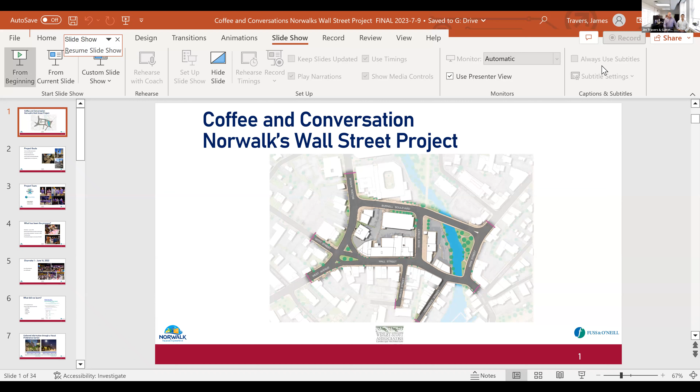Can I interrupt you for one second, guys? Can you put your presentation on slideshow mode? It didn't come up that way. It is on slideshow mode for us. Hold on, we'll stop sharing and restart it, because we're showing it on slideshow mode. Okay, hold on one second—a couple of people said they couldn't see it, so I want to make sure everyone's seeing it as you talk. Are we seeing it in full screen now? Yes. All right, that's great, it's just the same way we left it. Perfect, oh good—and one of the people who couldn't see it can see it now, so maybe there was just a little glitch.

Zoom quit unexpectedly. Am I still there? You're good, we're on the project team slide. That's weird, I just got a mess. Okay.

All right, hold on one second. Now I froze, right? All right, there we go. Okay.

So building upon that, the first workshop was June of 2022. From there, we gathered all the information of what people said in a really exciting way. We shared those ideas in our second design charrette in November of that same year. From that, we wanted to make sure we were on target, that what we heard from you, your priorities as a community, aligned with the data we're finding from traffic and land use. And we got a final design.

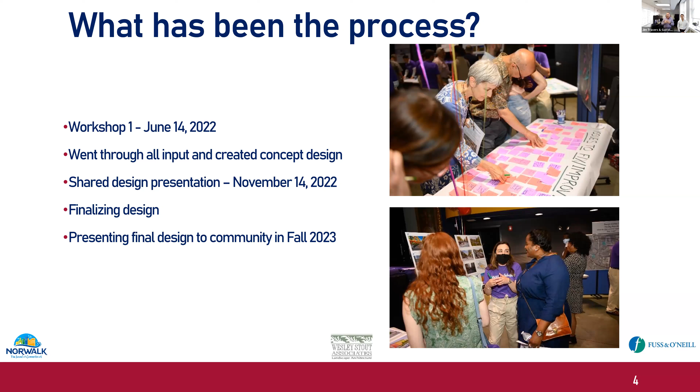We got the okay, and we're fine tuning that. We're going to present the final design to the community this fall, and then start ramping up the actual construction documents from that. We'll have a good baseline of really where we're going to go with the whole plan at that point.

So I want to talk a little bit about some of the outreach we did, particularly the first meeting. As Jim mentioned before, there were a lot of planning studies done, about one every 20 years, so there was some disbelief that this project was actually going to get done. We really wanted to make a big splash with our first public community meeting, and it was really all about just listening, without any preconceived notions or designs in mind.

So we chose a site within the neighborhood. I think it's really important to bring the project to the neighborhood, and that was the historic Wall Street Theater. As you can see, it's really large - we were able to accommodate over 350 people, but really it's about having good outreach.

It's just about making it fun. We were all wearing purple shirts, some with fun sayings like 'amaze walls,' 'wall-tastic,' 'wall sensational,' just to bring some levity to the project. We also brought in local vendors and businesses to do a tasting of Wall Street, so we had a lot of food available to really highlight the strengths of all the businesses in the area. We worked with the library to bring in historic photos, and had a section you could walk through to relive some of the history of the neighborhood.

In an effort to really make a splash, we had an elementary school band there to lead the kickoff. But we didn't do a formal presentation - it was designed as a charrette with a lot of different tables for engagement, which allowed us to get a lot of feedback, whether through sticky notes, writing on posters, or just having a conversation with the project team. We were able to get over 3,000 individual inputs, which was really fantastic.

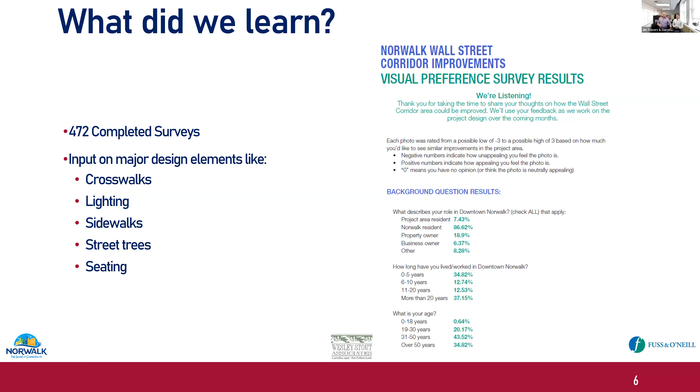From the survey, this is a quick glimpse of what it looked like. We provided an online survey allowing people to look at images, and then we asked them to rate those images. How did it make you feel? This is about creating an environment, and an environment is about how we feel. So we asked: did people find this kind of lighting appealing? That became the driver of how we went through with the plans going forward.

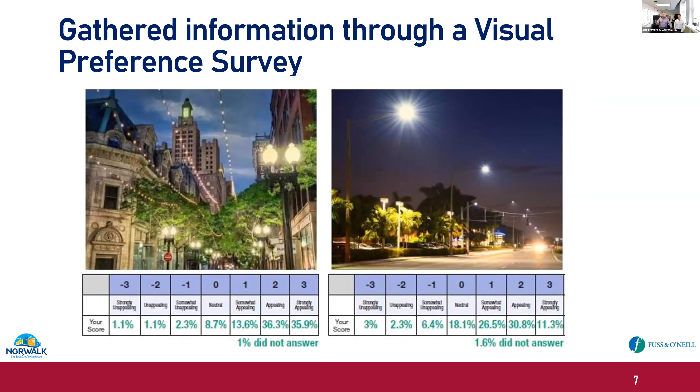So next, just summarizing what we heard. A lot of it was about the neighborhood and its scale. We understood from the public that it was really designed to be auto-centric for throughput of traffic, and one of the largest pieces of feedback was about bringing down the scale to a pedestrian level. And of course there were a lot of safety concerns.

This corridor itself has some of the top ranked intersections for crash rates in the city, and also some of the top roadway segments. So we heard a tremendous amount about safety, and not only safety, but also perceived safety as well.

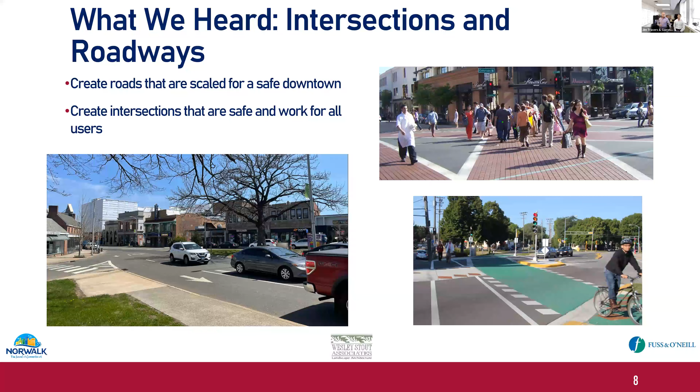Parking, right? We always hear about parking. So the parking was a number of things. The city instituted angle-in parking a few years ago, and what we heard in large numbers was that people didn't like angle-in parking. They wanted to make sure the new plan didn't include it. But we also have a garage, which many areas don't have the luxury of.

But our garage was built in the mid-1970s, and it very much looked like the 1970s. So they also wanted improvements to that garage, and you'll see on the lower left of your screen what the new garage looks like. We're adding a cornice to the top, a cornice to the bottom, and painting the ribs in between in varying shades of blue. The community got to vote on what the final look was.

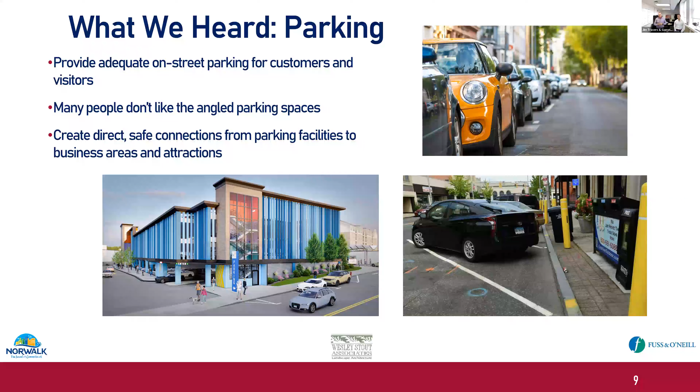We had a number of different colors and options to choose from, and we're also creating a plaza. What you're seeing on the left-hand side is largely the back of house, but we're changing that to really be an integral part of the safety, mobility, and invitingness that comes from our facilities. One of the things that's really interesting about this project is it's at the city center.

It's also at the convergence of several of our trail assets. We have the Norwalk River Valley Trail, which is going to be a regional attraction. We have the Harbor Loop Trail, and we were also looking at doing some types of river walks. So it was really important that we continued to provide that multimodal connectivity through the neighborhood.

One of the advantages to redesigning a downtown area is if we can't accommodate a dedicated bike facility on one street, we can look at other streets. What really came out of the meetings was Wall Street—there was a really big desire for wider sidewalks, and we could only do that if we moved the bike routes to a different roadway through the area.

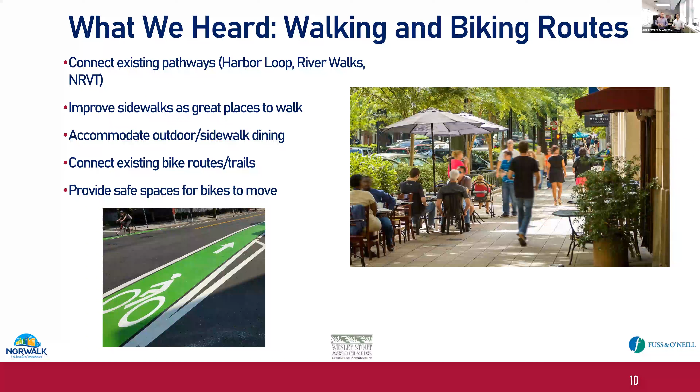So we looked at Burnell Boulevard as being that bike route, and it worked really nicely because we had a pulse point and a transit station it would connect directly to. There were a lot of trade-offs we made, but ultimately we were able to capture all these elements in the larger project design. So back to the transit facilities that we heard about.

A number of years ago, the city turned Burnell Boulevard from two-way to one-way and made it a transit hub. We have limited crossings across the Norwalk River, and this presented a bit of a challenge.

The neighborhood really wanted the bus pulse point to be integrated into the neighborhood, moving from the angle-in buses to parallel stops that we can elongate through the entirety of Burnell Boulevard. We heard that, and we want to improve the transit facilities, so our plan includes that.

Gathering and event spaces: we met with the community on several occasions, and this was a really critical part of the project. They had looked to close some existing streets, such as River Street, but it was cost prohibitive. So a big part of this project was designing a curbless street from the ground up to accommodate these gathering spaces.

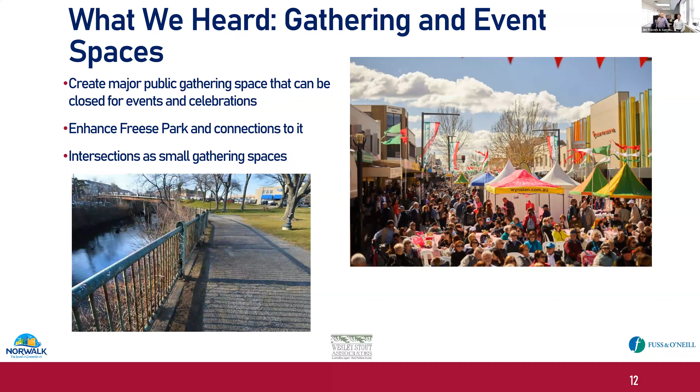Traffic, the thing we live and breathe, right? Garrett was talking before about the challenges - this is the first crossing of the Norwalk River that's north of 95. So it's really the first local crossing that we have.

We knew that presented a challenge, so we went through data gathering, did analysis, provided the results, and that led us to what we could do. We have to make traffic work. We heard from the community that safe throughput of vehicles is our priority as well - it's been our priority for our careers. But what we were really able to find is that it's possible to accommodate high volume traffic areas and really create a complete street.

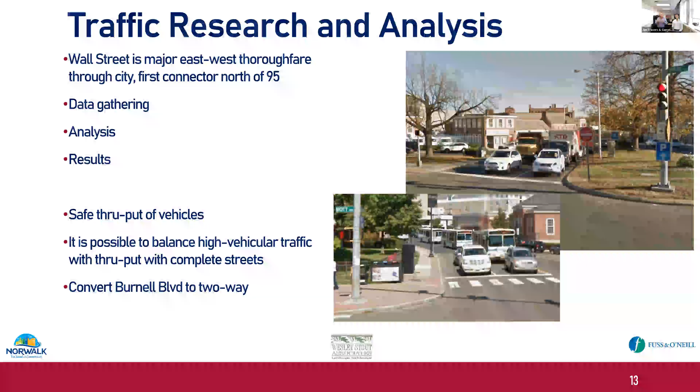We redefined what the bus pulse point could look like, and we are positioned to convert Burnell Boulevard to two-way.

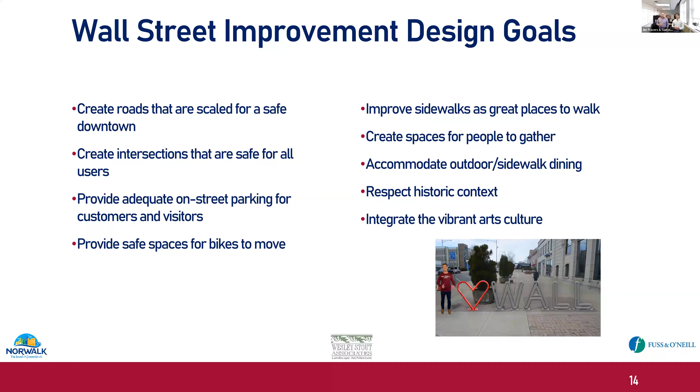Just to review the design goals: bringing the scale down to a pedestrian level was a priority, along with making sure we could accommodate all modes throughout the entire project area. Parking is a priority too, to have it adjacent to businesses and improve access to other facilities. We have a lot of parking in the area, whether lots or garages, but the biggest criticism today is just the perception of safety, so that's something we really looked at. You'll also see emphasis on getting gathering spaces strewn throughout the larger corridor project and bringing in some of the history.

So we're going to run through what the design looks like. We'll go through it quickly since we're a little late on time. Are we good, Melissa? Okay, great. Perfect, then we'll just go ahead.

If everyone can free up the rest of the afternoon, we can talk about Wall Street until we are blue in the face - Belden, West, and Wall intersection. This intersection was the first thing that Garrett and I looked at, and we thought, whoa, there's a lot going on here. We have high speeds because of these pull-ups, and as we looked at it, we found a lot of crashes coming through this corridor.

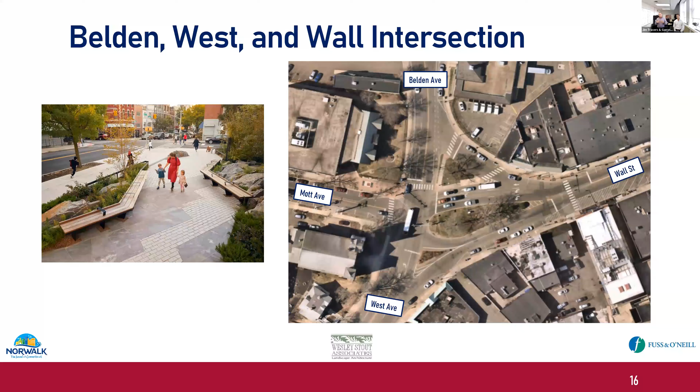The thing many of you probably noticed is that if you're a pedestrian, you're screwed - you just can't get through here. You can see in the center island there's a line where pedestrians have just started walking through; we're not accommodating pedestrians here. That's one of the first things we really wanted to fix: create a pedestrian-friendly environment. So we have a realignment to this - drum roll - you'll see two big plazas appear on each side, and a normalized teed-up intersection that tees up with Mott.

And we've created the correct number of lanes that's going to support the traffic, so we're not going to have backup, but it's really going to create a gateway. These plazas on each side are about creating a gateway into the community. We're seeing something like inspiration coming to us from the image that was on the left of the screen.

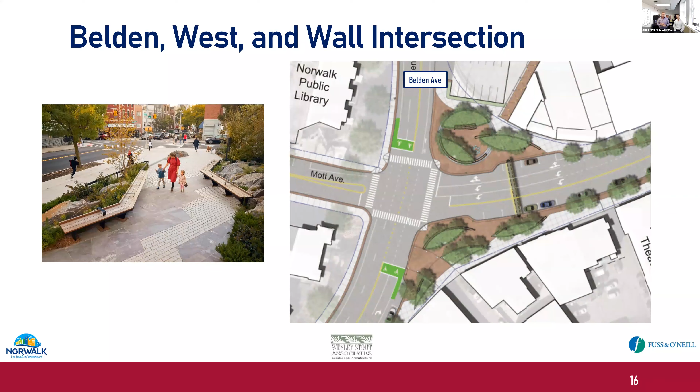These are some of my favorite slides, just showing you what was before and what we're really looking at doing. Here you can see, again, really limited sidewalk space, not able to accommodate a frontage zone, on-street dining, or anything of that nature. The back-in angle parking just takes up a lot of space today.

What we heard from the community is they would be perfectly content moving to a more parallel configuration if we were to reclaim some of the street space. So as the design advances, we're looking at a much narrower street, much more room for frontage zone for businesses, clear space for pedestrians, and beautiful sidewalk amenities.

But some of the things I wanted to point out, which we really love here, we have a raised crosswalk. We're able to eliminate some signals, one being a pedestrian signal, and incorporate a raised crosswalk. That really just pays homage to the community, a local musician born here, a famous jazz musician, Horace Silver. And it's right in front of the theater, so a great photo opportunity.

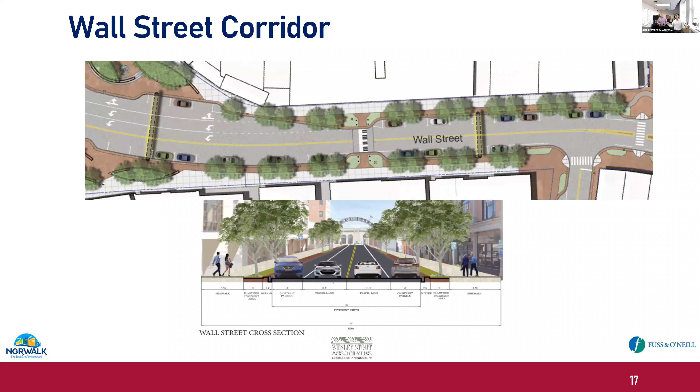You'll see we included some gateway arches over the street, and we also eliminated another signal at Isaac Street. One of the great things about complete streets is when you move into the street and bump out the intersections, you can actually get better sight lines that did not exist in such a tight, historic, confined area prior to that.

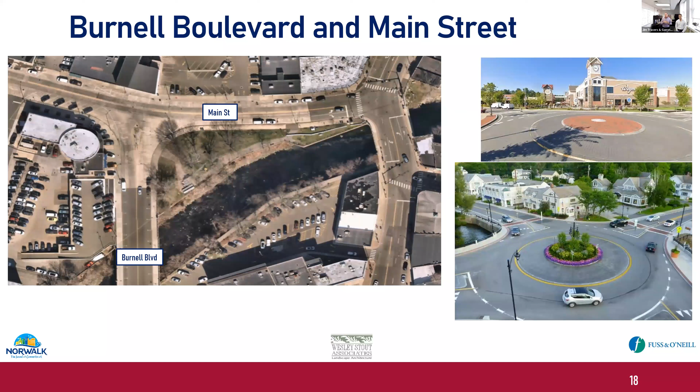Burnell Boulevard and Main Street - you see on the upper left hand side of the screen where Burnell Boulevard meets Main Street. Turning Burnell Boulevard to two-way is obviously going to increase the opportunity for traffic that's going to go through. How do we navigate that intersection in a safer way? How do we make sure the buses can navigate through there and do their turning movements?

And what we got is an introduction of a roundabout. So this is going to be our first roundabout that we've done. Our board has a number of other opportunities for roundabouts that we're looking for funding to happen, but this will be, I think, an integral part of how we move.

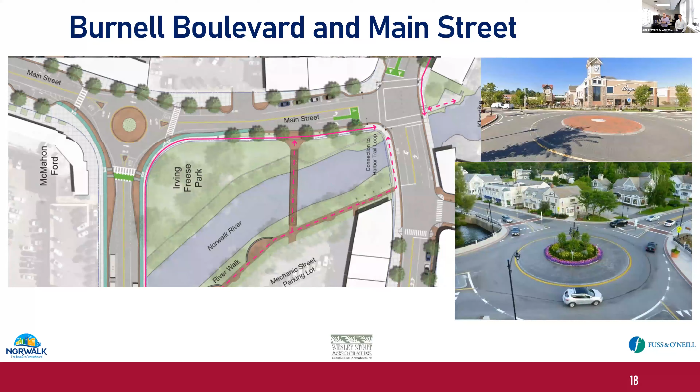Getting cyclists through here, but really talking about creating a corridor that has slower speeds, that's going to be respectful of the business center that's in there. So we're super excited about integrating this into it.

And this brings us to the pulse point. So what you see before you is a section of Burnell Boulevard that's one-way today. And we know that making a successful downtown is really about connectivity. So how we can take this section that exists today, that Jim touched upon a little bit, but it really just serves as a bus depot. It's not really connected, it operates a little bit in isolation.

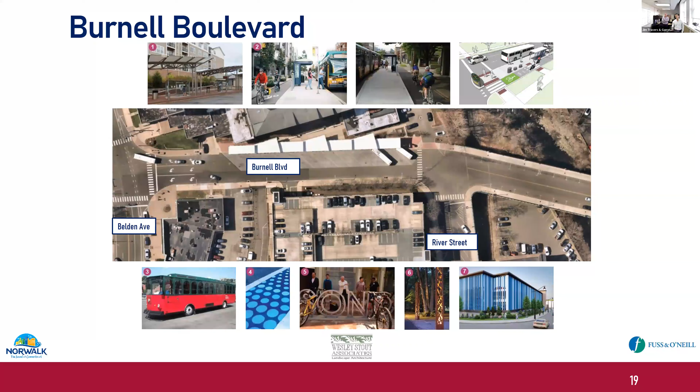And how we can connect it better to the neighborhood. So you'll see a design that really moves out the angled spaces, which has been a huge challenge with vehicles and pedestrians when buses have to back out. This comes up with a simpler configuration where the buses just line up in the direction of the routes they serve, and can actually use the roundabout should they need to turn around and exit.

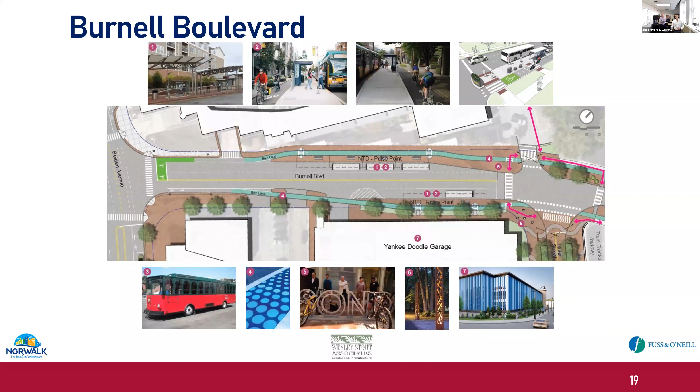But you'll see a two-way street that has bicycle facilities connecting directly to the pulse point. On the right side of the screen, a raised intersection for traffic calming. And one of the other advantages of making the street two-way is we have an access point to the garage. So we'll get a lot more activity, and instead of people having to circulate the neighborhood and use wayfinding to find the garage, it will be right there at street level, improving the accessibility of that garage.

Sidewalks and public spaces. So we're back to where I started when I talked about the initial part of what we did with this intersection configuration, getting these islands here, really paying homage, getting really wider sidewalks, setting the tone that this is a pedestrian friendly environment, and that we're creating this gateway feature, but it's also this meeting area and meeting space that people could go to.

So that largely started to talk about what this intersection could look like. I think this is the intersection that's going to change the most here, and you'll see very easy pedestrian access going across here, but really wide sidewalks that make people feel comfortable.

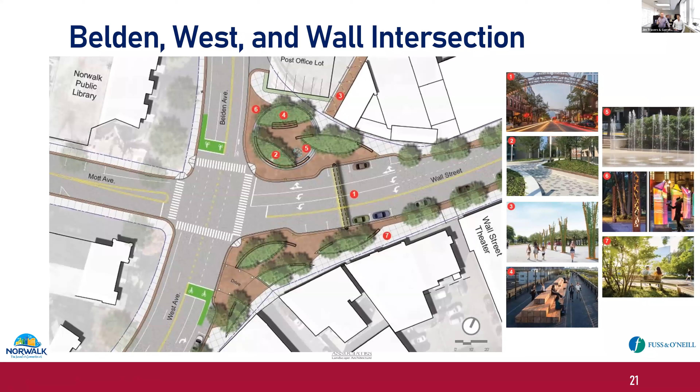Here's just some examples of the gateway treatment we looked at. On the bottom of the screen you can see the arches, which we look to have about 4 to 5 that just set the tone throughout the corridor and make this neighborhood somewhat unique.

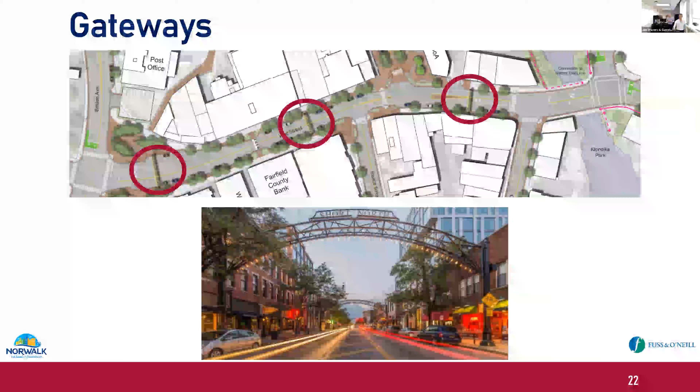We talked about that. Our conversation with the theater is that for every band that they have there, they can do the Beatles walk across the theater. So across that crosswalk, the picture of it is so that the theater is also going to be in the background. So it'll be a great little add-on tool.

But you see the screen on the top is really our inspiration that's going there. When you see those wings, those already take place in there today, and those are the Wall Street wings. It's a mural that already exists, and we heard from the community really the opportunity to enhance those more throughout the corridor.

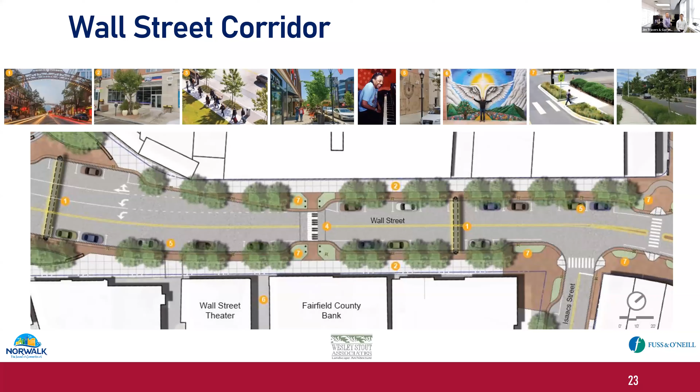This is a tremendously important component of the project, the perception of safety. I go back to it, but really just making sure the area is much more well lit. People are comfortable walking to and from the garage and the lots.

And then you'll also see a large emphasis — we're one of the laggers as a community as far as urban canopy. We also have really high amounts of impervious surface in this neighborhood, and we're a coastal community. We're subject to climate impacts, and we also have the river right there. So there's going to be a tremendous amount of green infrastructure included in the project as well.

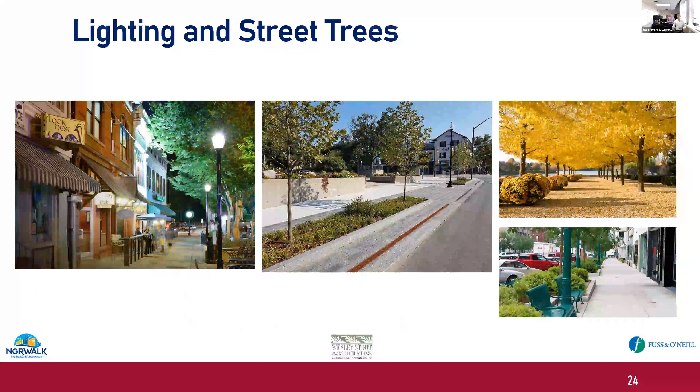You can just see some examples here, and also the streetscape. The historic content — we heard this left, right, and center. We really wanted to make sure that we're paying homage to the history that is Norwalk.

But what we really feel is that we can create a shuttle operation that looks like a trolley, connecting Wall Street to Sono to East Norwalk to Wall Street, just doing that constant loop. We heard that there were a lot of trolleys that went down here.

And in fact, the trolley repair section house was on Wall Street. So we know that there are trolley tracks underneath the road. How do we incorporate those in some element afterwards? We don't really know — we're just going to wait to see what we find, but we know that we have bricks under there, and we're going to make sure those are an integral part of the future design.

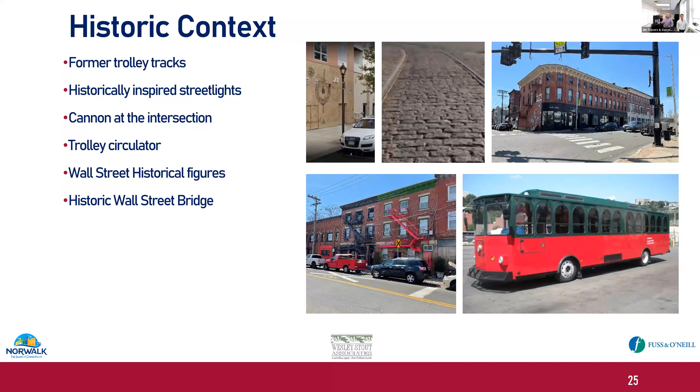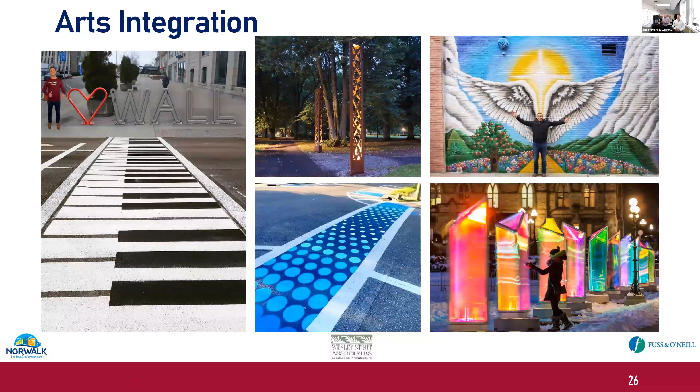So we quickly did a design and Photoshopped myself in there to convey at the public meeting. But you see some other examples of decorative crosswalks, opportunities for murals, and some unique placemaking elements that are really inspiring the design moving forward.

But again, we have the angle parking that people don't like. What we found through our analysis is that once we start putting buses in the right direction, once we have Burnell Boulevard two-way, this street becomes important because it has the mid-block connection we want to maintain to our garage, but it's not a necessity every time. So this is a great opportunity for us to design this as a curbless street that can be closed for festivals, right?

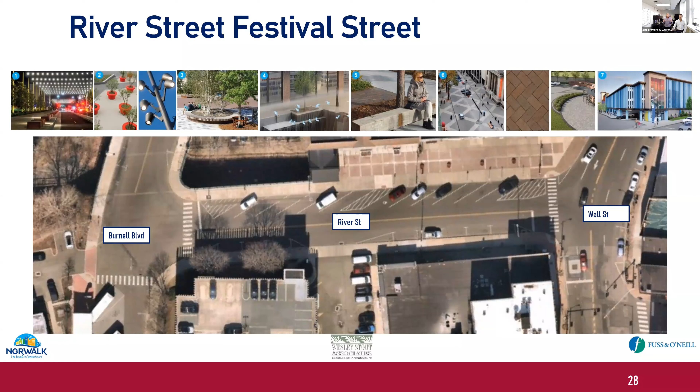You see the waves that go through the pattern we have here to represent our River Street. What you saw was a smaller street that really accommodates the vehicles going through, but all in a curbless environment so that it could be closed down for festivals. In fact, this is where we hosted a Wall Street Christmas holiday celebration and tree lighting this past Christmas.

Just to start showing people this is what we think could happen if we close the street down and have a festival. We were competing with Stew Leonard's tree lighting at that time, and we held our own. I think we saw the community really demanding this is going to be something we do going forward, so this is a great opportunity for us on River Street.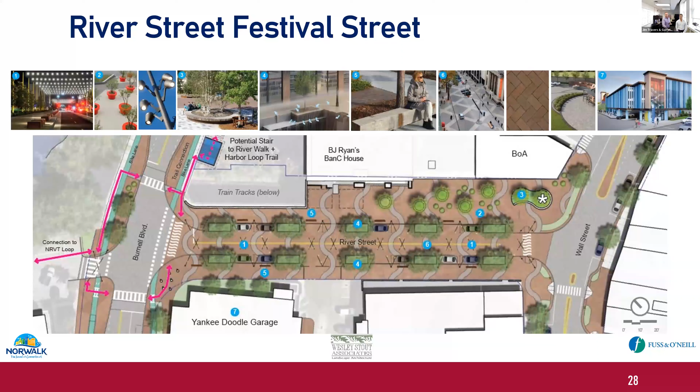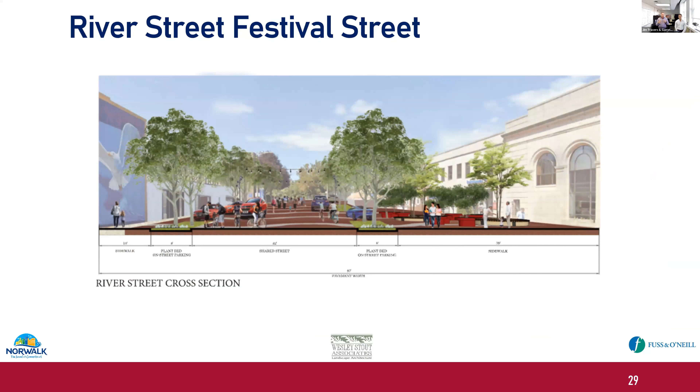This is again just another look at it because we love this one so much, so we wanted to show you another view. This is what we imagine this could be as this really pedestrian gateway that also allows vehicles, but the tone is going to be much different.

And lastly, integration of Freese Park. So you'll see some inspirations and some things we looked at. On the top left of the photo, we have a municipal parking lot, and how we can reclaim some of that space to improve access and sight and views to the Norwalk River. So you'll see a river walk.

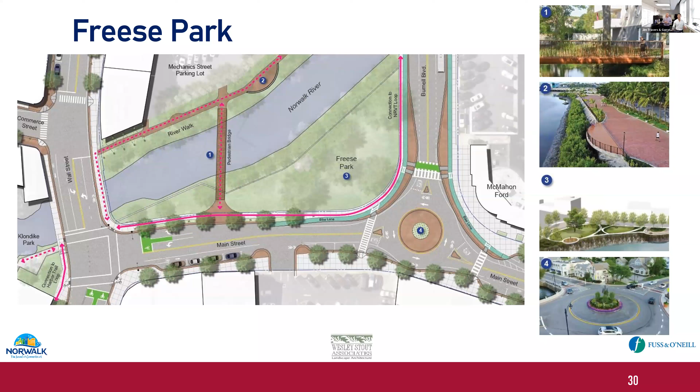You'll see, I don't know if you can see my cursor following through, we are in negotiations with the federal government now and the post office to create an easement or a procurement of this land swap, since we have some other land that we can give them to create a better parking lot for them.

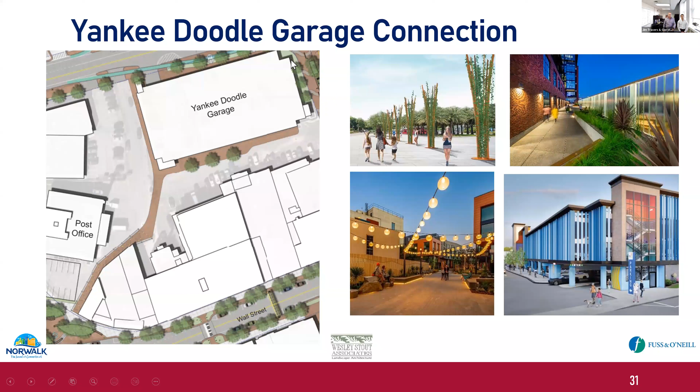But this will get us a connection to Wall Street, so we'll have this connection to the top of Wall Street. We'll have another connection via River Street to a mid-block crosswalk. So this garage is really about creating more access and making it really useful to the community. The library is also up here, so big opportunities for us to really have the garage support the local business.

And our last drum roll—I think we forgot a drum, right? But this is what it looks like in its entirety of what we've been talking about through the last 20 minutes or so. This is the project area, but hopefully you see the big difference.

We have an off-road cycle track on Burnell Boulevard, the roundabout, and a pedestrian bridge going across the Norwalk River. I think when we drove the area the first time, we didn't even know the Norwalk River was there. We're talking about removing all the deciduous growth around there, opening up the river to the people, and putting a pedestrian bridge across, really highlighting and connecting each part of this project to the various parts of the community.

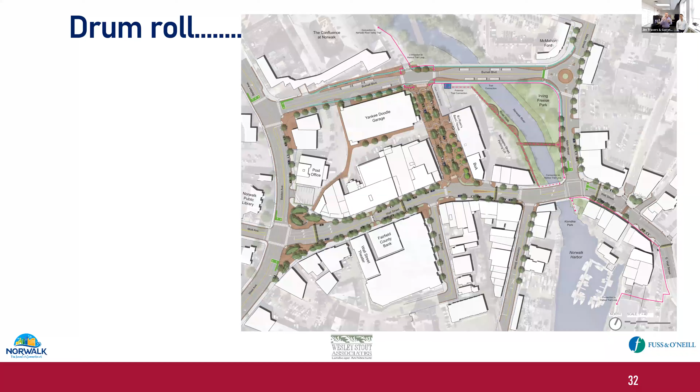So really super excited about this. So where are we now? Yeah, so through the community involvement process, this project has really grown, and it's estimated to be about $27 million. But everything you see before you today helped us sell that project to have commitments for $21 million.

So we're getting really close. We're working on the gap funding. It's a combination of different state, federal, ARPA, federal appropriations, state appropriations, and LOTCIP. What we really imagine is this is going to be a multi-phase project, which will take place over the next 5 to 6 years.

And what is going to happen, we're really excited—we just got our authorization to advertise phase 1, which is going to be an existing LOTCIP grant for East Wall Street. It's about a block between Main and Brook Street, but it's really going to set the tone of what this project is. So we hope to be in construction, shovel in the ground this fall, and after that we'll work on subsequent phases on a yearly basis until we can get each component of the project done.

Before we leave this stage, I just want to say, the fact that we are $21 million funded of a $27 million project is pretty amazing. I think it's amazing to this gentleman right here who's tirelessly written grants to make that happen.